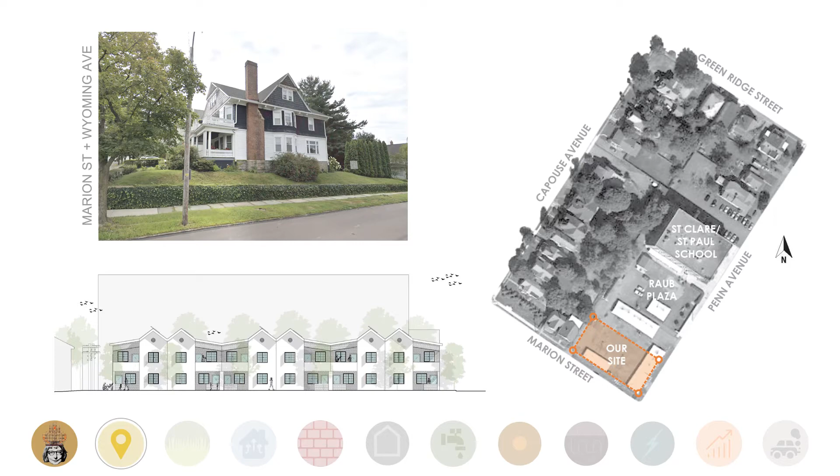We partnered with the 2 local Habitat for Humanity groups to revitalize this block by infilling vacant surface parking lots with affordable net zero energy townhouses that integrate PHIUS Plus principles for energy efficiency, positively impact the blighted flora and fauna of Scranton, and provide desirable, safe, functional, and healthy homes that will sustain families who will build vibrant communities.

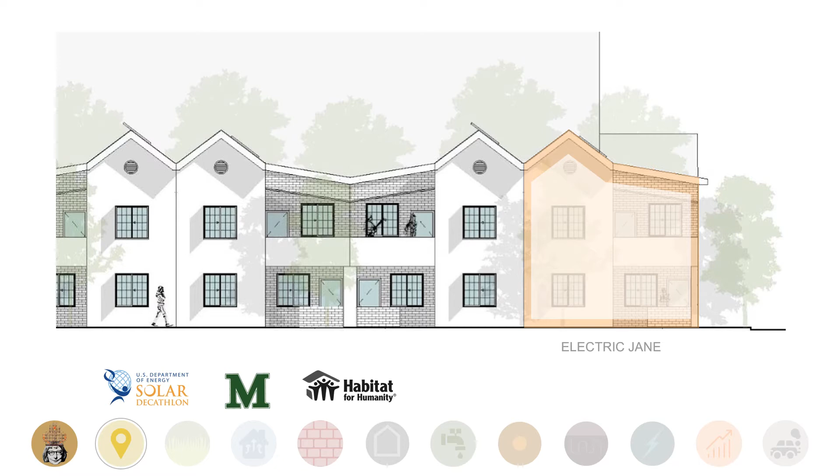We used the current Habitat for Humanity design for a single-family detached house called the New Build and the Scranton Passive House as benchmarks for comparison. Additional partners included the designer of the Scranton Passive House, Richard Pedranti Architect, Steve Diute of Greenman-Pedersen, who designed the geothermal exchange system using the flooded mines on Marywood's campus, and BuildSmart, the manufacturer of our prefabricated assemblies.

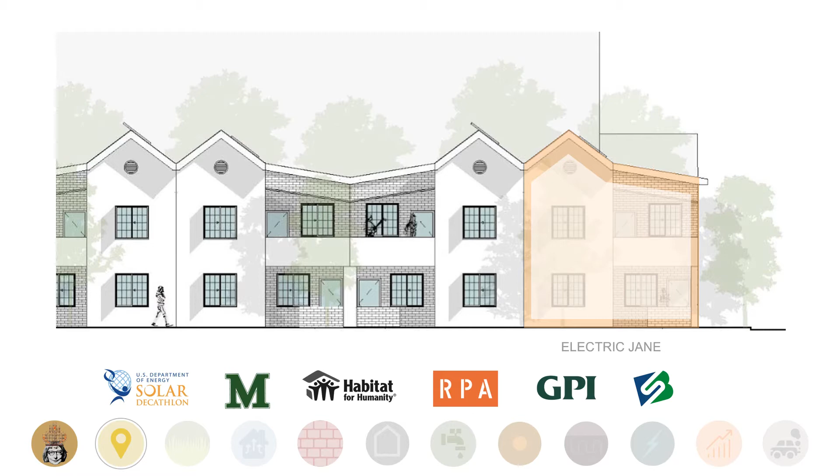Providing healthy and safe environments informed the mission statement of the occupant experience by delivering ample, well-lit, and comfortable spaces for family interactions, as well as personal spaces for individual activities. Inside and outside living rooms, front and back porches, and community playgrounds will provide the highest quality setting for the life of each family and the surrounding community.

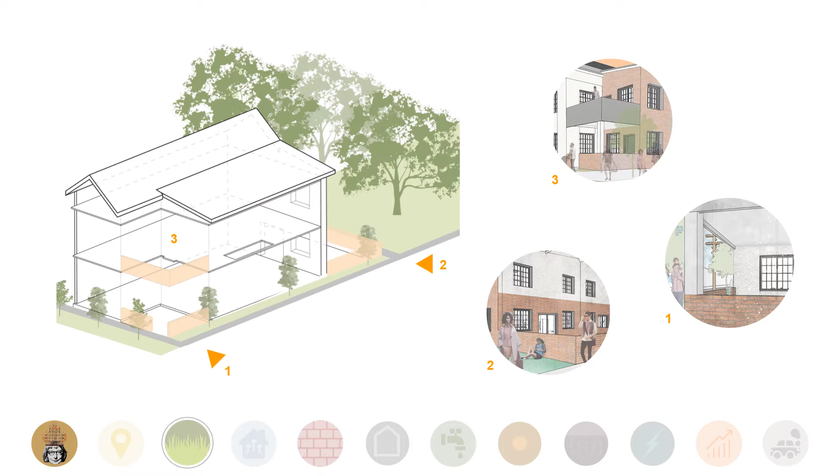The Electric Jane has 3 outdoor spaces, upper and lower porches on Marion Street, and a deck in a backyard facing Raub Plaza, Jacobs' eyes on the street. Between the playgrounds and basketball court of Raub Plaza and the backyards of the Electric Jane are 20 community garden plots, with a tool shed that collects rainwater for irrigation. Jacobs' parks as community collectors.

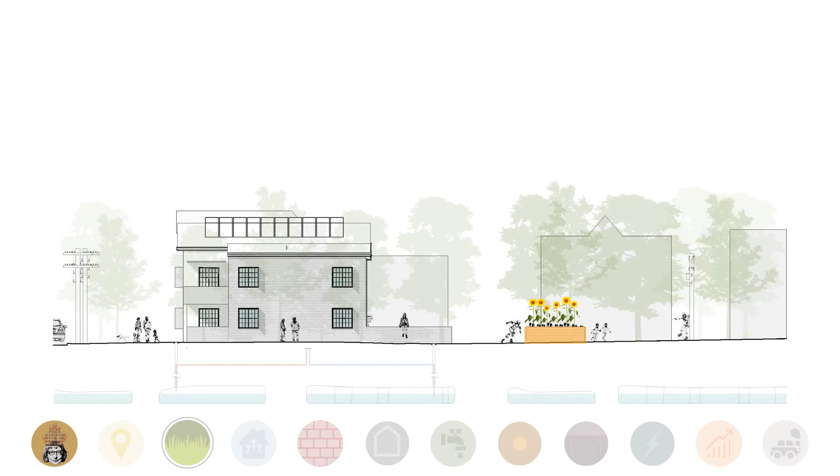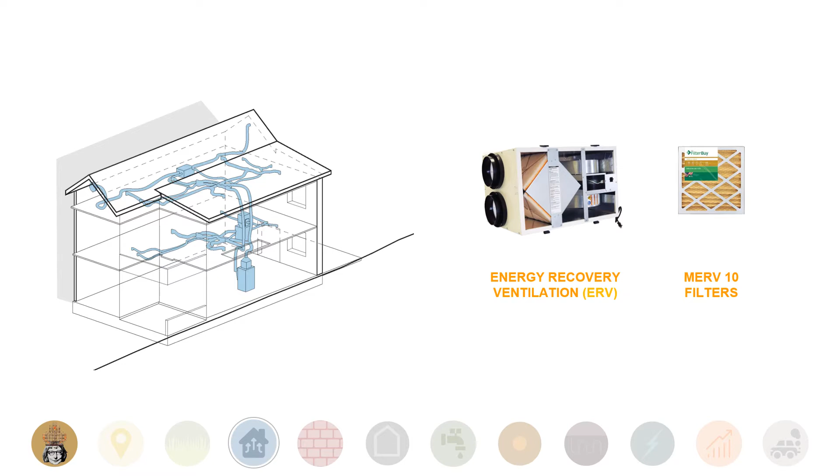The Electric Jane homeowners will experience exceptional quality of life with ample and comfortable spaces for family experiences, all while saving money on electricity, carbon, and water, leading to both psychological and physical comfort and environmental quality. Geothermal heating and cooling is one of the most environmentally friendly ways to regulate the temperature of a home. Each Electric Jane will use an open-loop heat exchange with 2 vertical wells, tapping into the underground water from the flooded anthracite mines.

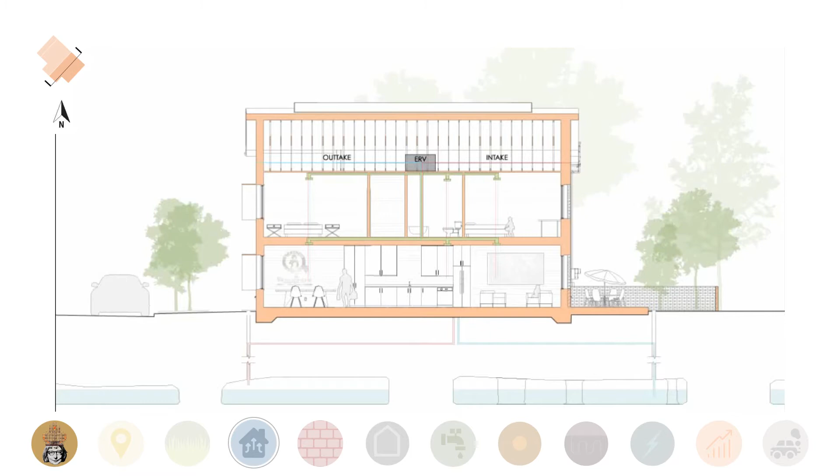A larger upfront investment in materials and thoughtful detailing will increase the quality of the building enclosure, both its durability and resilience, as well as integrating dynamic renewable energy and environmental systems that are capable of withstanding weather events and subsequent temporary electrical grid disruptions.

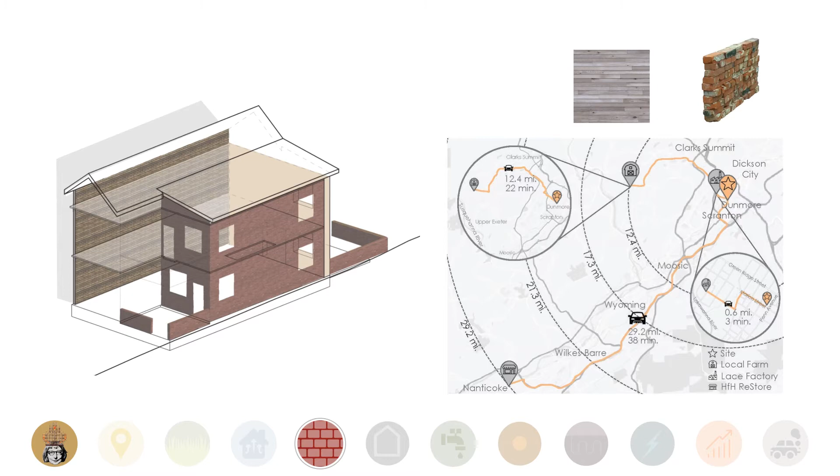On the exterior, the Electric Jane uses local reclaimed brick from the Scranton Lace Factory and stucco, both common building materials in Scranton, allowing the home to blend into the neighborhood. Already a sustainable alternative to asphalt shingles, the metal roof panels will be donated by the local Habitat ReStore.

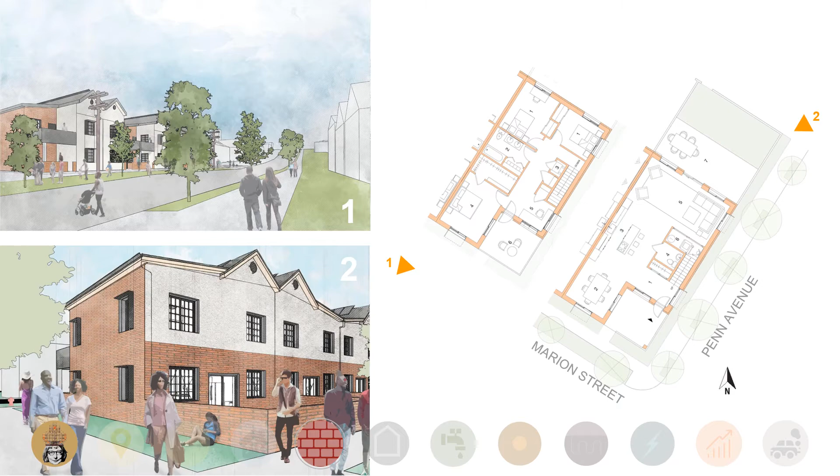On the interior, to lower our carbon footprint, 73% contributed by materials, the concrete slab is polished and the continuous wall in the open living, kitchen and dining room is clad in local reclaimed barn boards. All paints and finishes emit low VOCs.

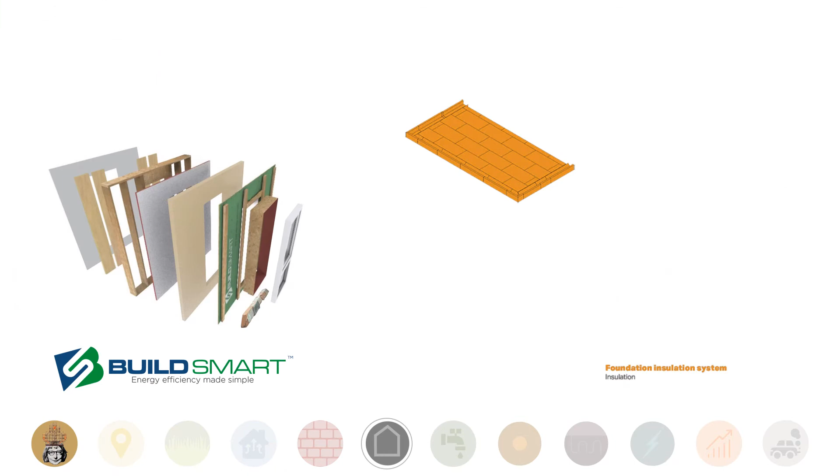PHIUS Plus thermal envelope standards are achieved using prefabricated foundation, wall, and roof assemblies by BuildSmart. With pre-insulated windows and doors, these panels are easily erected on site by Habitat for Humanity volunteers who only have to tape the joints between the panels to create the required highly insulated airtight envelope.

In comparison with our benchmark houses, Electric Jane's foundation, wall, and roof assemblies, as well as windows and doors, achieve R values that far exceed those of Habitat's new build house and are on par with Scranton Passive House. Rockwool insulation in the walls and roof creates an excellent acoustic barrier, and expanded polystyrene surrounds the foundation slab.

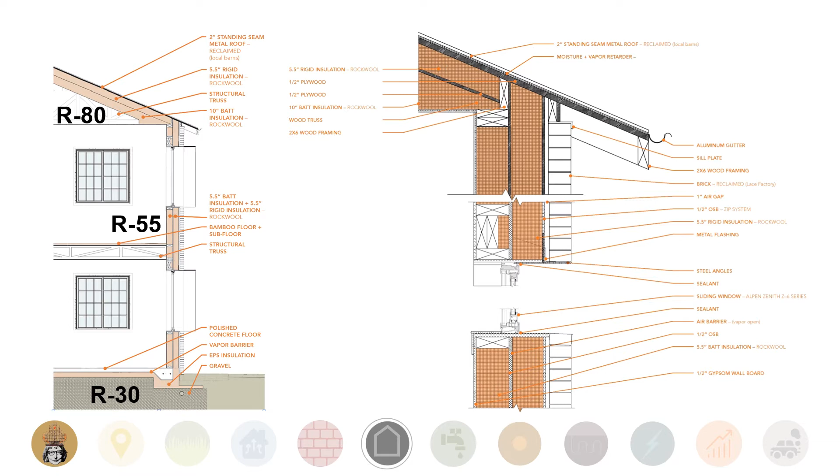The Electric Jane is designed to withstand environmental and man-made risks to the health, safety, and comfort of the homeowners. Our highly insulated airtight thermal envelope will withstand seasonal periods of high winds and freezing temperatures. Our structure and rainwater collection system will easily handle the region's above average rain and snowfall. Slab insulation is extended horizontally to buffer against the freezing ground temperatures.

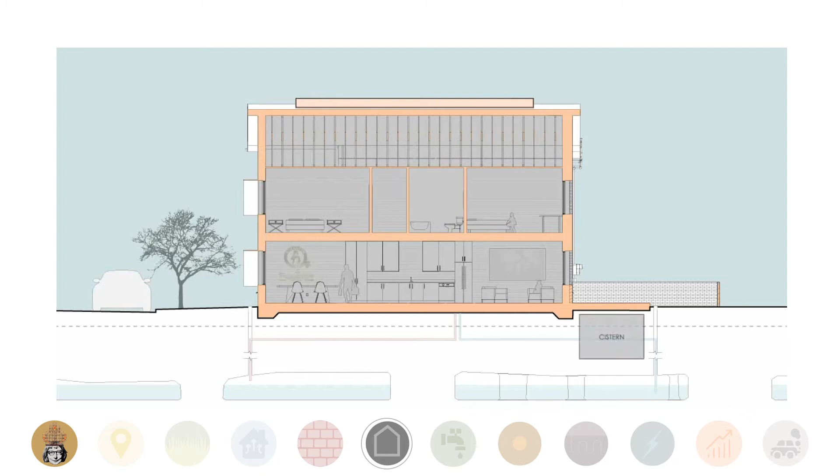Water supply and sewer pipes are below the 3-foot deep frost line, and geothermal pipes are kept below 12 feet to maintain constant temperatures. Threats to the electric grid and water supply, such as cyber attacks, weather, and accidents, will have less impact due to our on-site energy and rainwater collection systems, such as rooftop photovoltaic panels, an underground cistern, and geothermal exchange.

The Electric Jane plumbing system is divided into a rainwater system and a potable system, engineering a reduced water footprint by 1/3. Annually, each house collects 31,000 gallons of rainwater to flush toilets, run laundry, irrigate the landscape, and other outdoor use on the property. Under potential drought conditions, a full cistern will last for a month before switching to municipal water.

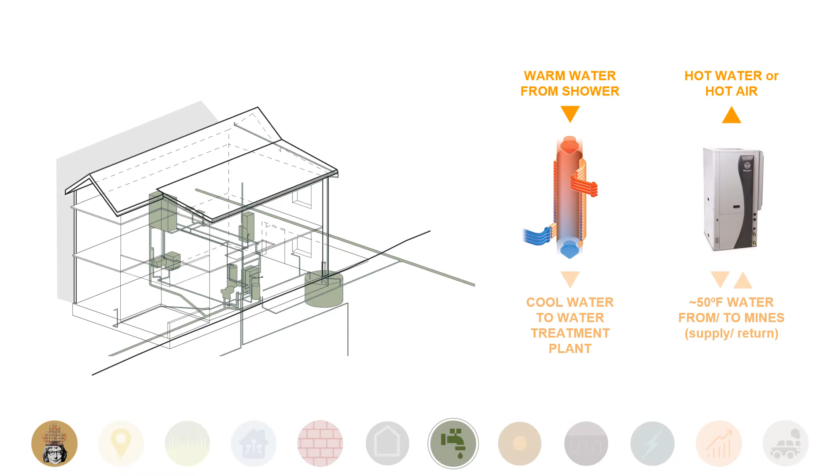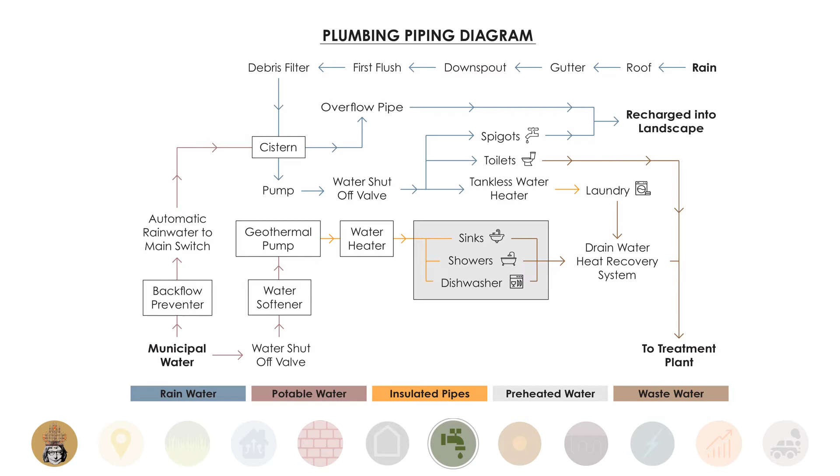Hot water is tempered by geothermal heat exchange and heat recovery from drain water, allowing for a 60% heat water transfer that would otherwise be lost, saving the occupants money each month.

The design and engineering of the large south-facing windows allow daylight to illuminate and seasonally warm the interior. Solar shading fins are utilized on the southwest and southeast windows, both calculated and sized to the solar orientation, passively blocking strong sun rays during the summer, ultimately reducing overheating, while allowing the winter sun to warm the house in the cooler months.

Given the height of the windows, the 2.5H rule as well as Insight simulations were utilized to estimate the light penetration from the windows to provide a sufficient influx of ambient light to the house. During daylight hours on sunny days, enough light will enter the rooms without supplementing with electric lighting. During evenings and nights, our Energy Star certified lights provide an even room distribution with ceiling can lights on dimmer switches and task lighting with pendant fixtures and table lamps.

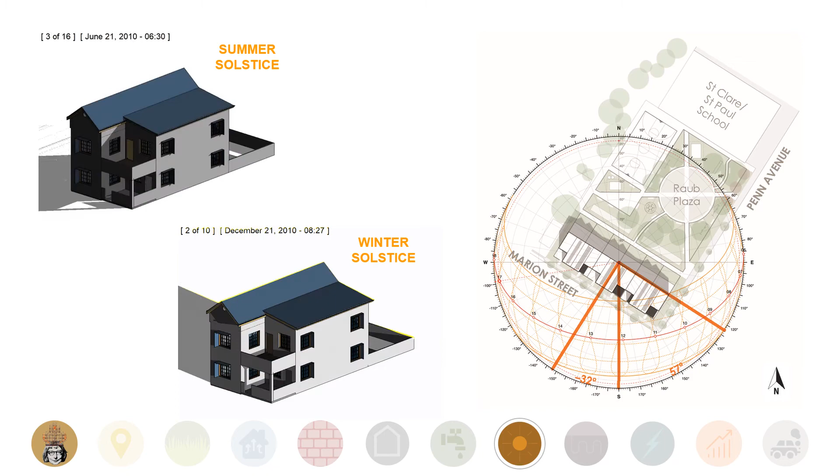The Electric Jane harnesses sunlight, rainwater, gentle breezes, and subterranean thermal mass through the use of passive solar, daylighting, photovoltaic cells, an airtight envelope, ERV, and an open-loop geothermal system to increase energy and water efficiency, thermal comfort, and a healthy home environment. These integrated systems reduce homeowners' water and sewer utility bills, drastically reduce their electric utility bills using Pennsylvania Power and Light's, PPL, net metered energy credits with annual cash payout, and contribute to a sustainable community.

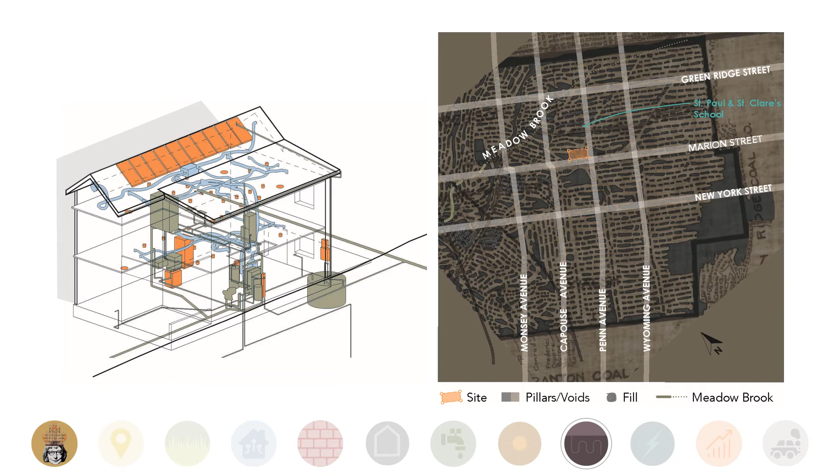For instance, by incorporating daylighting, Energy Star appliances and lights, appropriately sized and spaced, and an HVAC system tempered by solar gain, geothermal exchange, and heat recovery, the annual demand for electricity will be only 4,730 kilowatt-hours per year, and our modest rooftop photovoltaic system will generate 5,110 kilowatt-hours per year.

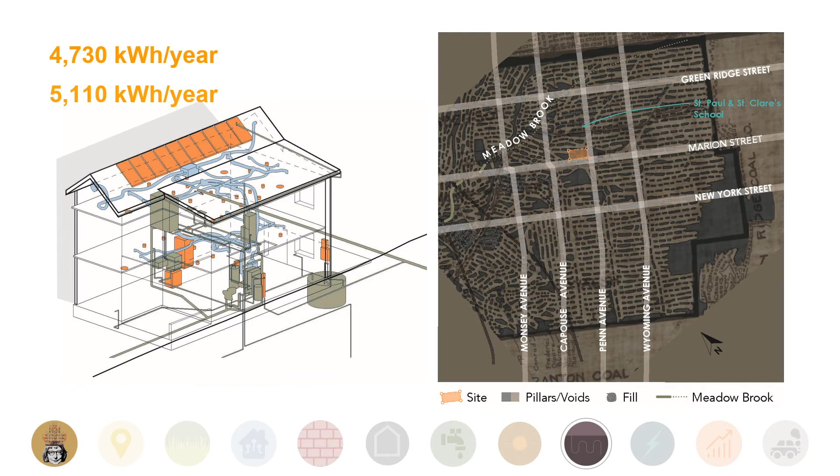The Electric Jane's energy performance will produce more electricity than its annual energy need to reduce monthly utility service costs and transmission fees of the local net metered program through Pennsylvania Power and Light, or PPL.

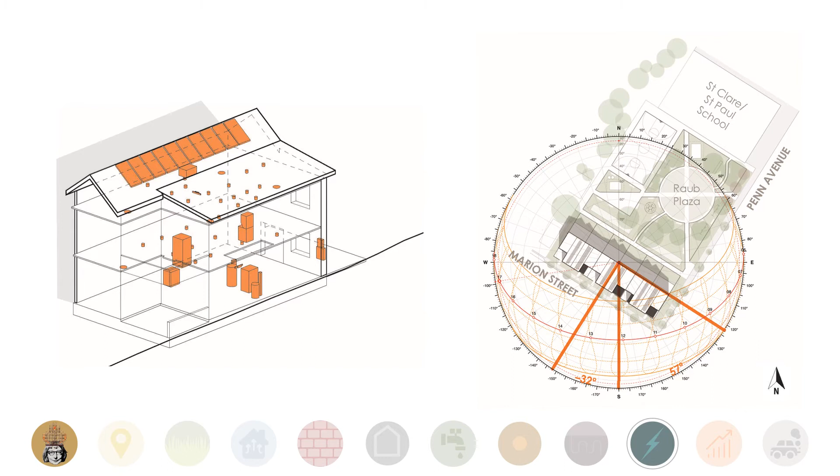On the sloped roof facing southeast, the Electric Jane's 10 solar panels have a 350 watt power generation capacity. Assuming 8 hours of sun, each panel will generate 2.8 kilowatt hours of electricity per day, which is more than the daily energy requirement to run the home.

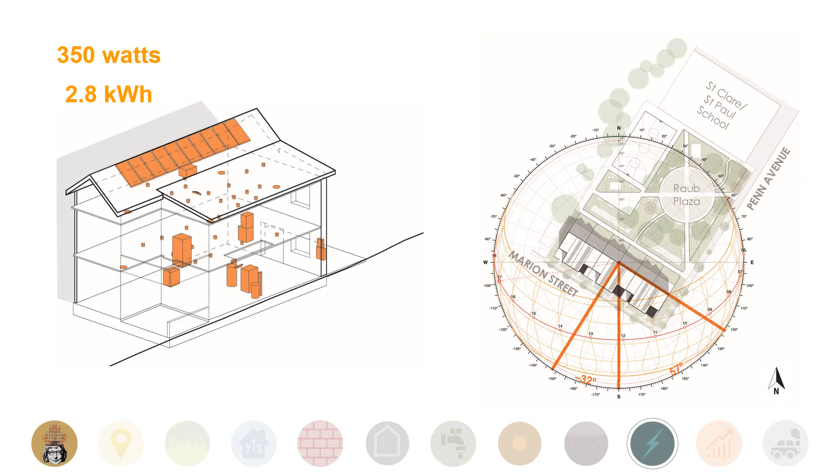During the day, the house will sell excess power back to the grid. On cloudy days, it may break even, and after dark, the house will draw from the utility grid, achieving net zero site energy. For the reduction of plug loads, idle loads, and conserving energy, the electric Jane relies on Energy Star rated appliances, fixtures, and light bulbs.

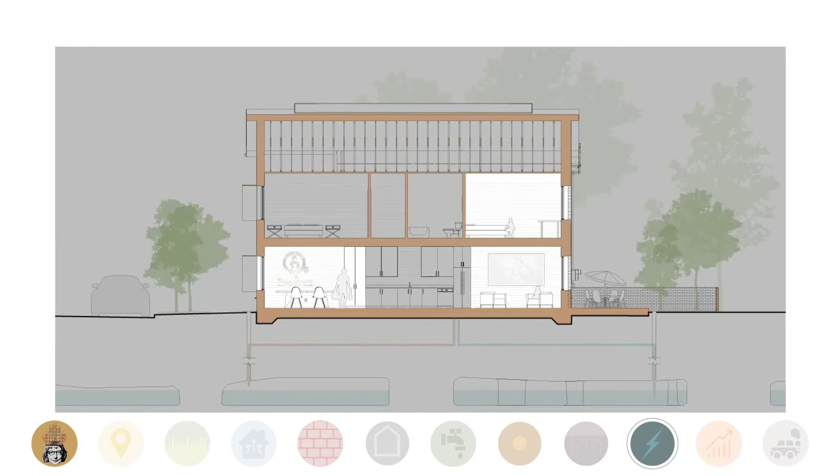Although Habitat for Humanity's new home build design also uses Energy Star appliances, our integration of passive design strategies and a high-performance thermal envelope results in the electric Jane being 55% more efficient. Other technologies, such as occupancy and vacancy sensors, contribute to the efficiency by detecting when electric lighting is needed and automatically turn off lights in empty rooms.

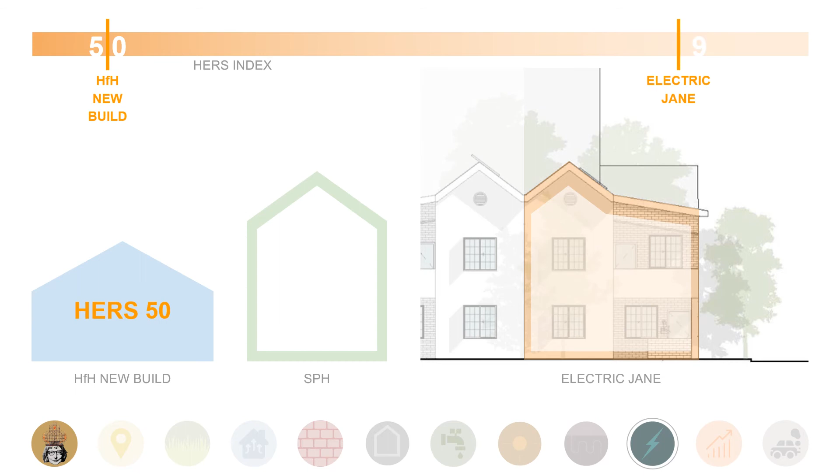The electric Jane qualifies for several stringent certifications. With a HERS index of 9 with PV power and 25 without, our design would qualify for Energy Star certification, given that all appliances and systems meet Energy Star requirements, and all mechanical systems and ductwork are within the thermal envelope. This meets the 2015 requirements established by the International Energy Code Council.

The electric Jane also fulfills the requirements of the U.S. Department of Energy's Zero Energy Ready Home program as a purely electric home that, for example, meets all the occupancy electrical needs with its 10 rooftop PV panels on site. The U.S. Environmental Protection Agency's Indoor Air Plus label would also be achieved with our selection of moisture control, HVAC, and combustion ventilation system, as well as radon-resistant construction and low-emitting building materials.

Lastly, the electric Jane will qualify for PHIUS Plus Source Zero with our design of solar orientation, high insulation, high-performance windows, airtight enclosure, and balanced ventilation with heat recovery. In fact, electric Jane exceeds the HERS rating of 28 by the Scranton Passive House.

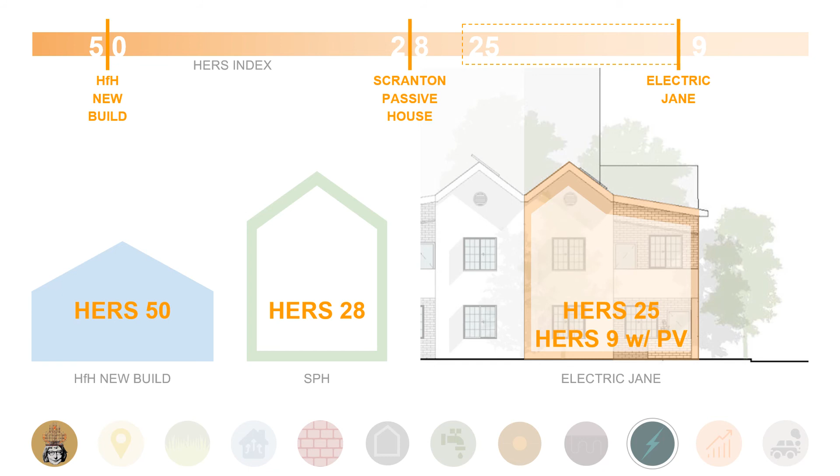Habitat for Humanity serves families who are in need of safe, healthy, and affordable housing and are willing to contribute their own sweat equity in the construction of the home and are financially able to make monthly mortgage payments. Our strategy is to provide the homeowner with higher quality, better materials, and renewable energy systems for a lower monthly financial burden of mortgage and utilities.

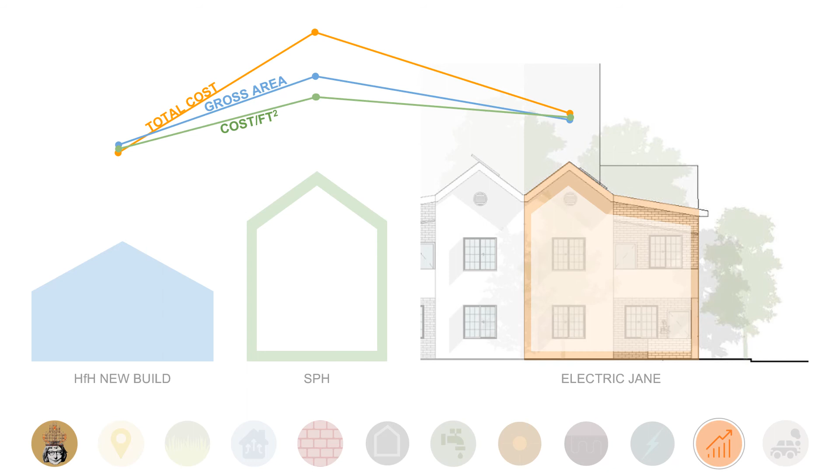The electric Jane will cost $139,724, while Habitat's smaller new build house will cost $95,000. The higher upfront cost is directly related to its larger size, renewable resource systems for energy, water, and heat exchange, and more efficient mechanical systems and material durability.

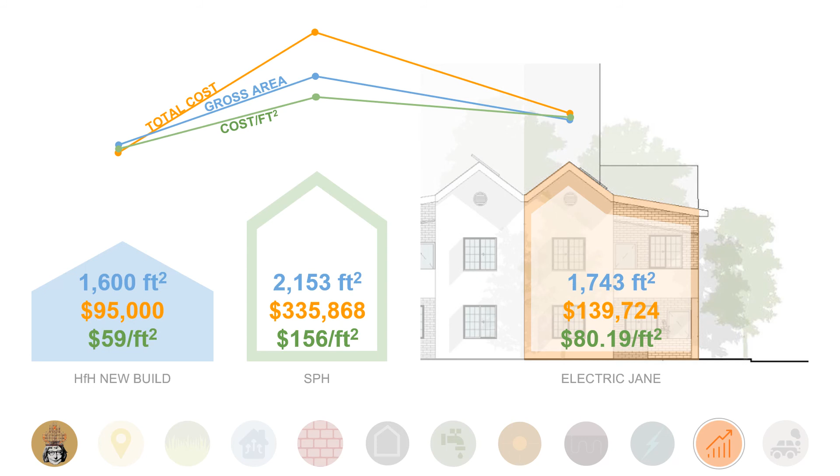With a 35-year 0% interest mortgage provided by Habitat for Humanity, the electric Jane homeowner's monthly mortgage payment would be $332 per month. With the same mortgage, the new build homeowners would pay $226 per month. In Scranton, for a family of 4 in a similar sized house, monthly utilities of electricity, water, sewer, and garbage are around $275 per month on average. But for the electric Jane, monthly utilities will only cost $36 per month.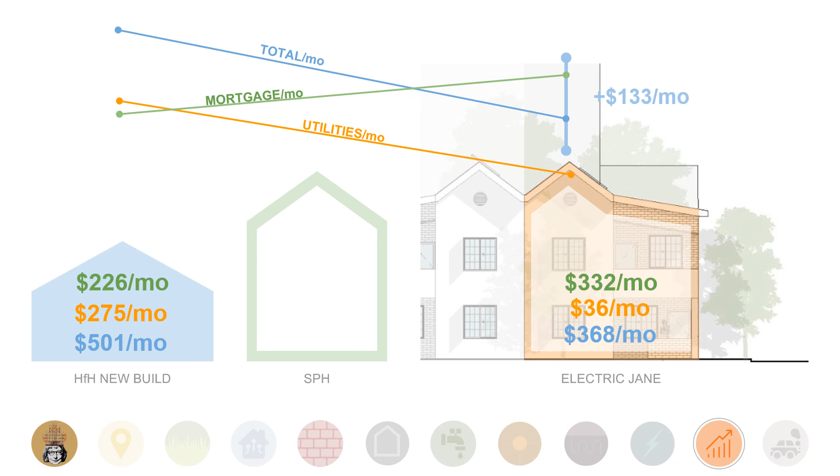Therefore, on a monthly basis, the electric Jane is far less expensive to own and operate at $368 per month for mortgage and utilities compared to Habitat's new build house of $501 per month. The electric Jane will save the homeowner $133 per month starting on day one, which will add up to $1,596 per year and $55,860 over the life of the mortgage.

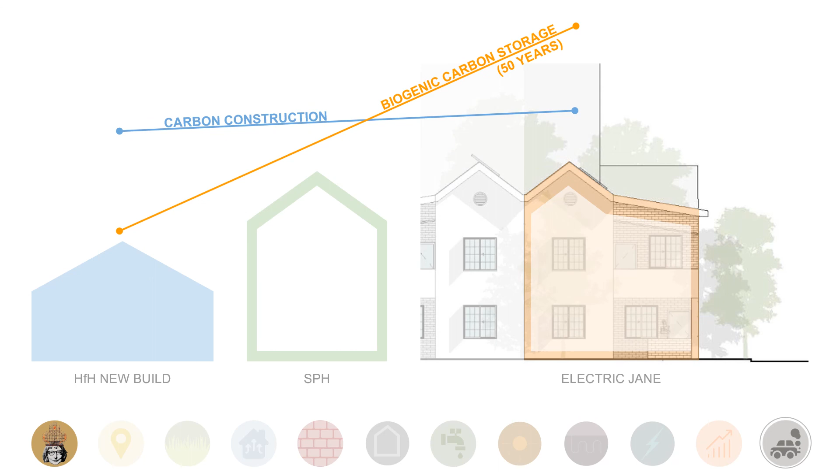The electric Jane received an A carbon rating using One Click LCA. Major factors of receiving an A rating are using reclaimed and recyclable materials, as well as on-site renewable energy systems. By comparison, Habitat's new build house received a B rating. The difference between these two homes is a consideration of circularity in design, selecting materials and products that can easily be recycled after their useful life, such as rock wool insulation, which can be recycled into new insulation.

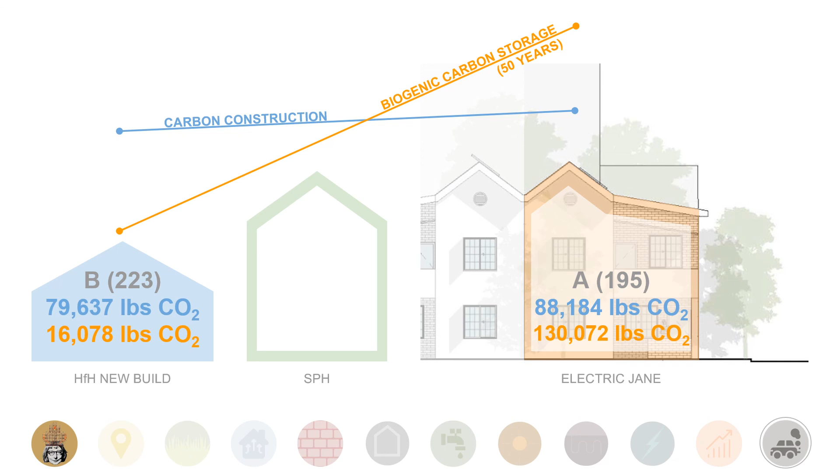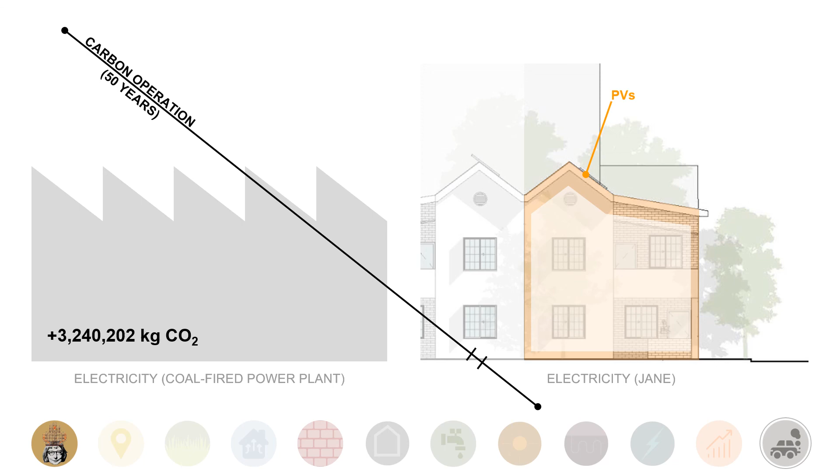The electric Jane fulfills Habitat for Humanity's mission of bringing people together to build homes, communities, and hope, and resonates with Jane Jacobs' vision of cities where everyone has a decent place to live that seeks to connect people in parks and on porches rather than isolate them. In following PHIUS Plus Source Zero principles, our design for the electric Jane ensures both the financial and environmental viability of homeownership for low-income families in Scranton now and in the future.